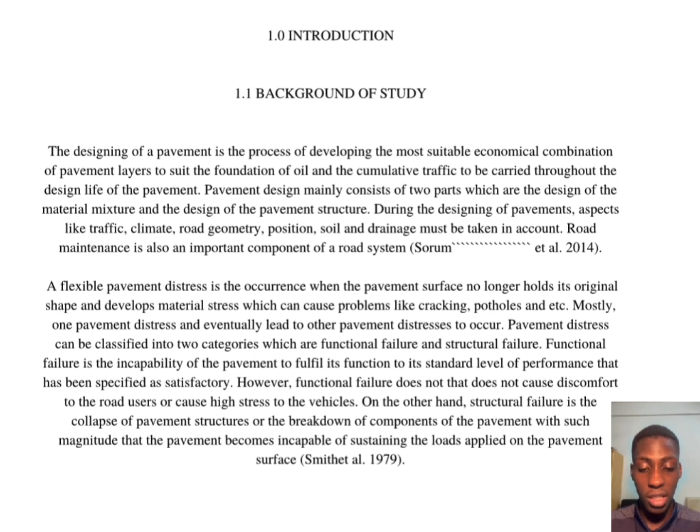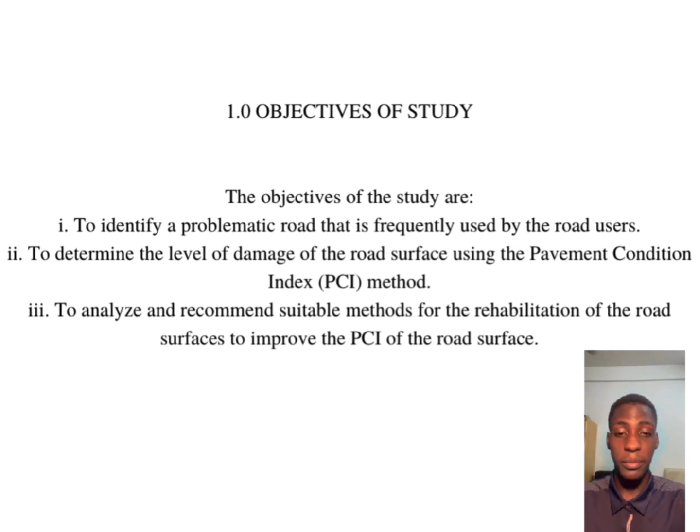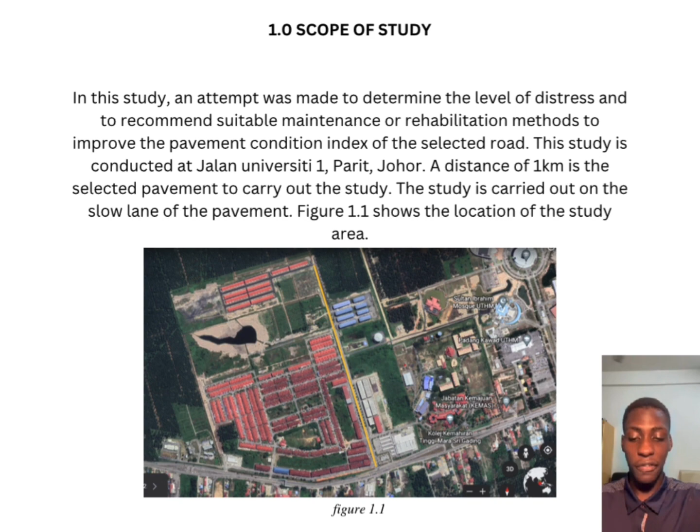The study is conducted at Jalan Universiti 1, Parit Raja, Johor. A distance of 1 kilometer is the selected pavement to carry out the study. The study is carried out on the slow lane of the pavement. Figure 1.1 shows the location of the study area.

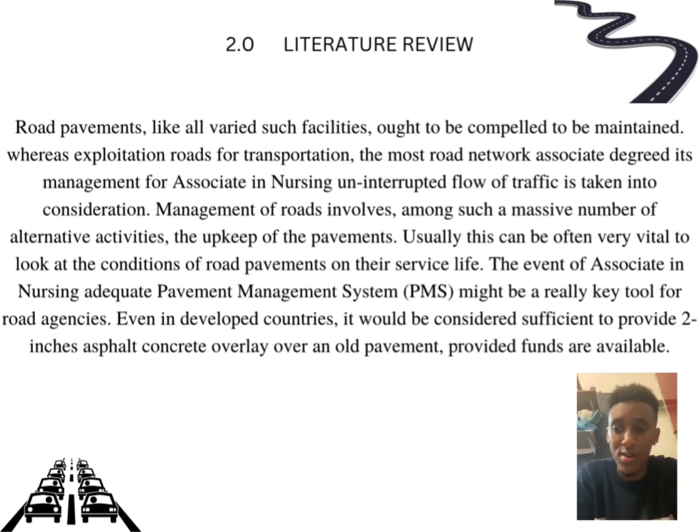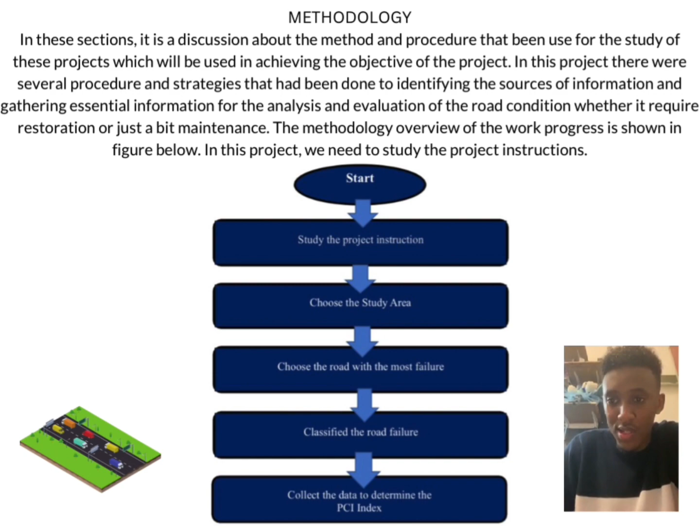So we start: study the project instruction, choosing the area, choose the road with most failure, classify the road failure, and do the PCI index test. These are the steps we follow to do the methodology.

First, the instruction was given by the lecturer during class, and all groups studied it. Second, we choose the area of the objective, and the area we chose was Jalan Universiti 2, Parit Raja.

Then, choosing the most failed part of the road is identified based on the criteria that the tendency of pavement failure is high and needs regular maintenance.

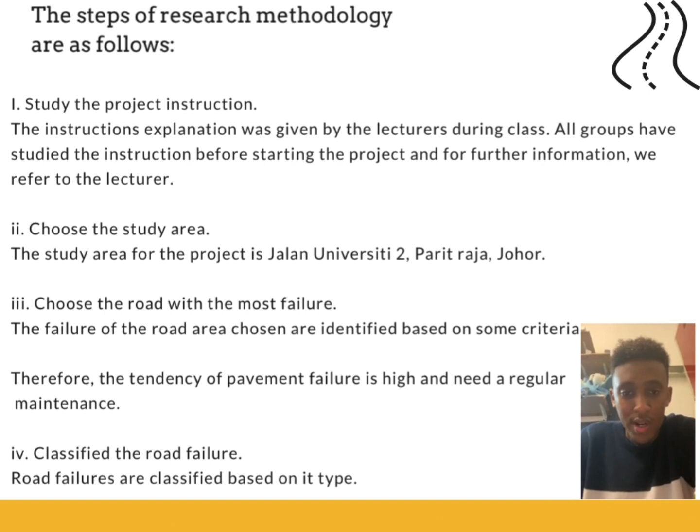At the end, we have to classify the road failure. Road failures are classified based on type: alligator cracking, pothole, shoving, cracking, etc.

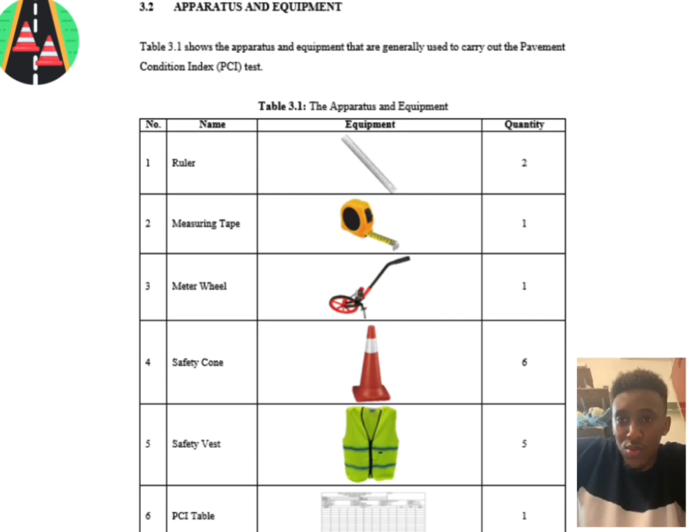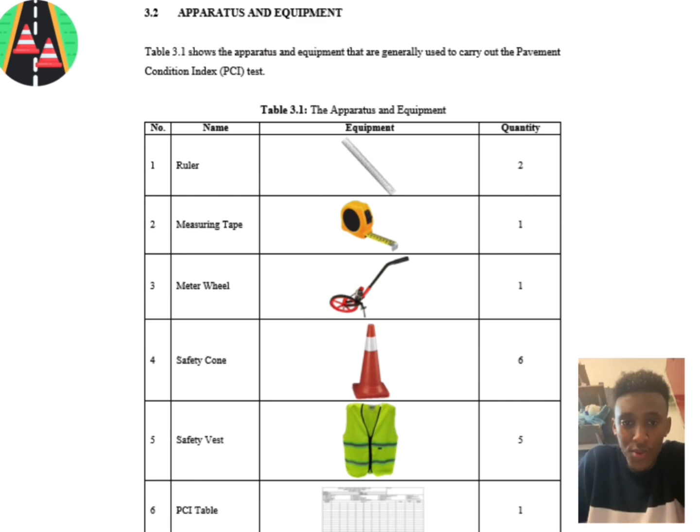Last but not least, this is the equipment we used to do the procedure: ruler, measuring tape, meter wheel, safety cone, safety vest, and PCI table to collect the data. Thank you, that's all from me.

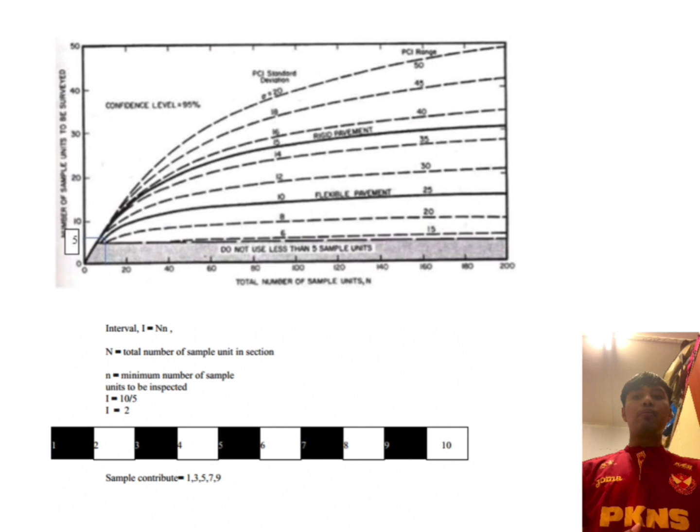When we were at the site, we inspected every section. We divided the section into 10 and inspected each one to find the distresses present. These are the distresses we found in the first section, which is about 100 meters in length and 7.36 meters in width. Because this section was recently maintained, the amount of distresses found was little, and they don't occupy a large percentage of the section's density.

The first distress we found is bleeding at low severity, and the other distress found is shoulder drop off, also at a low percentage. We also found weathering, which is a quite high percentage, but the area of the section is very large.

After finding the length and area of each distress, we found the total. Then we calculated the density using the formula total over area or length, depending on the requirement of the distress, then multiplied by 100 to find the density in percentage.

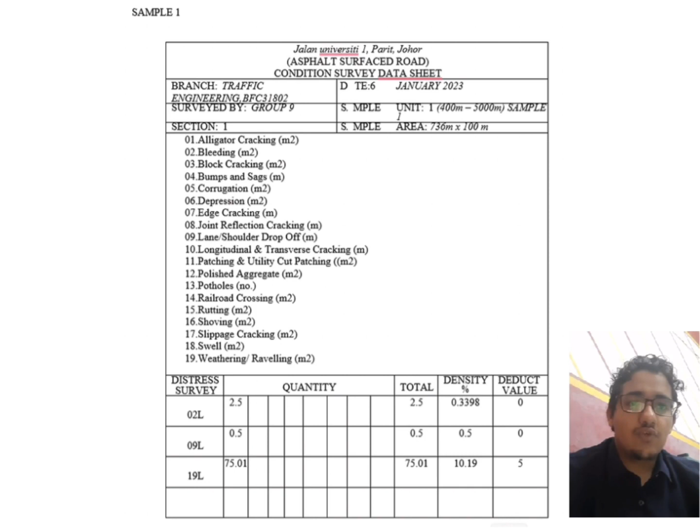From this density we used the density and deduct value graph for each distress to find the deduct values, then tried to find the maximum allowable number of deducts. For the first section, the highest deduct value was 5.

We found m using the formula 1 plus 9 over 98 multiplied by 100 minus the highest deduct value, which is 5, giving us m equals 9.72. Since 9.72 is less than 10, we multiply 0.72 with the number lower than 9. The only available deduct value is 5, so multiplying 5 by 0.72 gives 3.6.

From there we found the total deduct values, which is 5, and from the graph, using the selected deduct value, we found the CDV maximum.

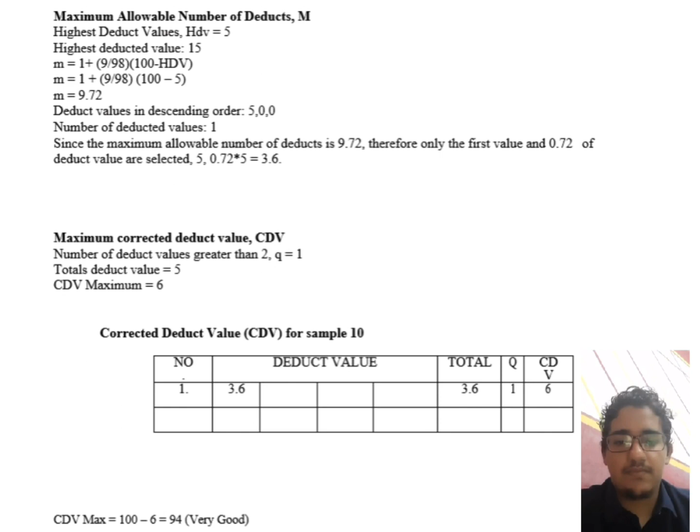For the third sample or section, all sections are divided similarly: 100 meters in length, and they all have the same width of 7.36 meters, giving a total area of 736 square meters.

In this third section, we found a lot of distresses: bleeding in low and medium severity, weathering in low severity, bumps and sags in medium and low severity, and also alligator cracks, but we repeated the same process.

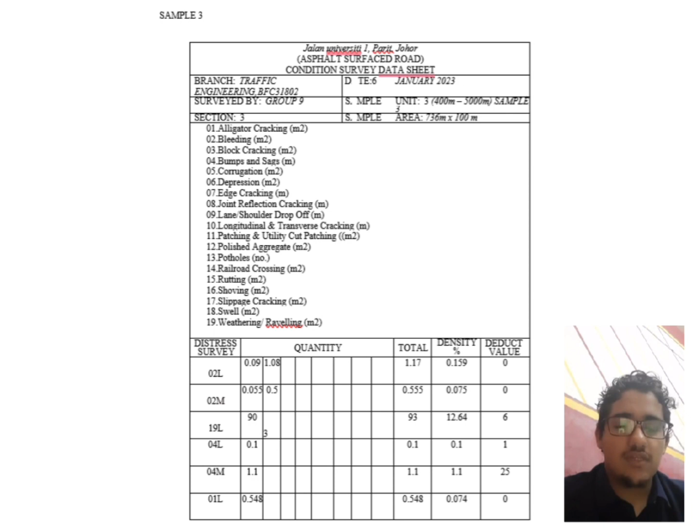We found the meters or areas required according to the requirements, then found the total. Using the same formula, we found the density, and from the density and deduct values graphs for each distress, we found the deduct values.

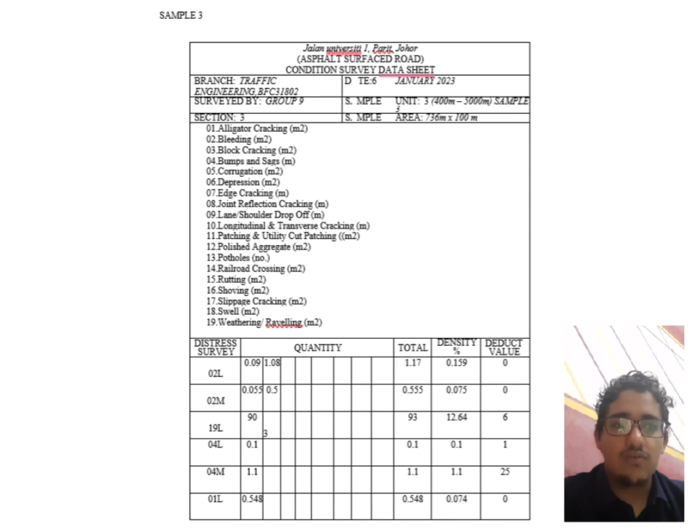In this section, the highest deduct value is 25. Using the formula for M, we found it to be 7.89. The values under 7.89 are 6 and 1, so we multiplied 0.89 with 6 and 1, finding them to be 5.34 and 0.89.

Using the corrected deduct value, we input them and found the total of the correct deduct values and the CDV max, giving us the correct deduct value maximum.

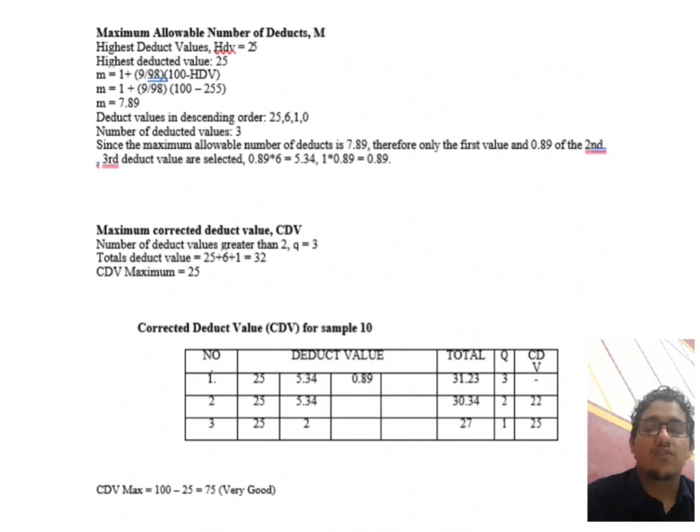Then we found 100 minus the percentage of the correct deduct value, and determined whether this road section is good, bad, or not satisfactory. We found that this road section is in very good condition. Next, I will explain about sample 5.

Then we measure the distress, referring to the type of distress. For example, weathering, we use the area to measure the quantity. Edge cracking, longitudinal and transverse cracking, we use the distance. While the pothole, we measure by number of potholes.

The next step is how we determine the severity, referring to the PCI standard. The standard already mentions how we determine the severity. For example, for the pothole, we must measure the diameter and also the depth of the pothole to get the severity.

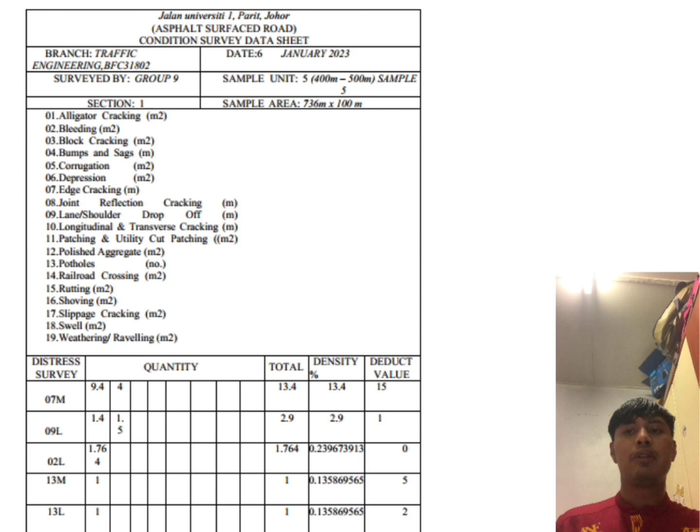After that, we total up each distress and then get the density. The last step, we use the graph of density distress versus deduct value to get the value of deduct.

Then we measure the distress, referring to the type of distress. For example, weathering, we use the area to measure the quantity. Edge cracking, longitudinal and transverse, we use the distance. While the pothole, we measure by number of potholes.

The next step is how we determine the severity, referring to the PCI standard. The standard already mentions how we determine the severity. For example, for the pothole, we must measure the diameter and also the depth of the pothole to get the severity.

After that, we total up each distress and then get the density. The last step, we use the graph of density distress versus deduct value to get the value of deduct.

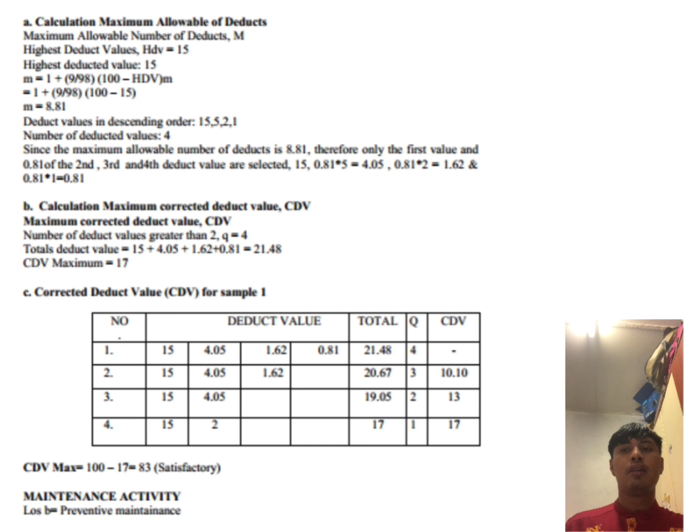The next slide, I will explain about sample 7, which covers chainage 600 meters until 700 meters. The types of distress that we found are weathering with low severity, bump and sag with low severity, alligator cracking with medium severity, edge cracking with medium severity, and lastly bleeding with low severity.

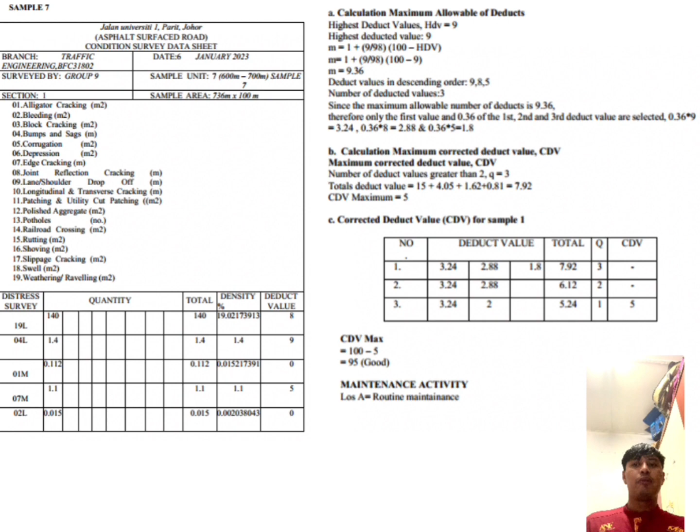With the same method as I mentioned before, we found that HDV will be 9. The maximum allowable deduct value will be 9.36. Then the corrected deduct value is 5. Lastly, the PCI value will be 95. So this sample is in category LOS A, for which the type of maintenance activity contributed is routine maintenance.

The last part, I will explain about sample 9, which covers chainage 800 meters until 900 meters. There are 4 types of distress that we found in this sample, which are bleeding with high severity, longitudinal cracking with low severity, edge cracking with medium severity, and the last distress is alligator cracking with medium severity.

With the same method as I mentioned before, we also found that HDV will be 37. Then the maximum allowable deduct value will be 6.79. The corrected deduct value is 39. So we get the PCI value of 61, with fair condition. So this sample is in category LOS C, for which the type of maintenance activity contributed is rehabilitation.

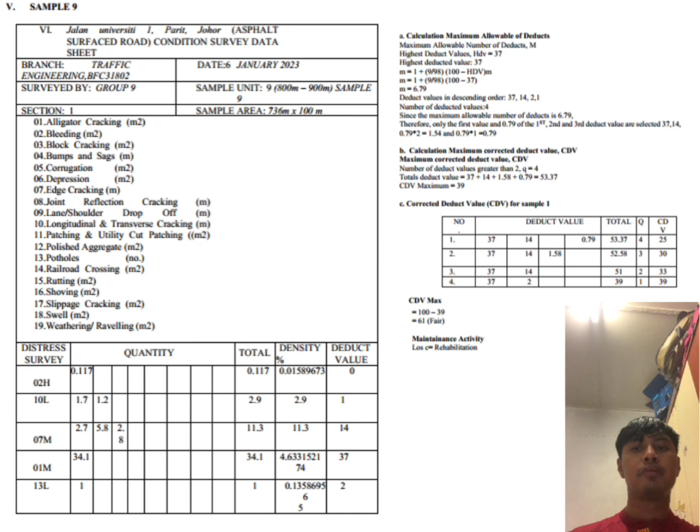So this table explains our summary data analysis. In the end of our data analysis, we can conclude that our average PCI is 81.6, which is in very good condition.

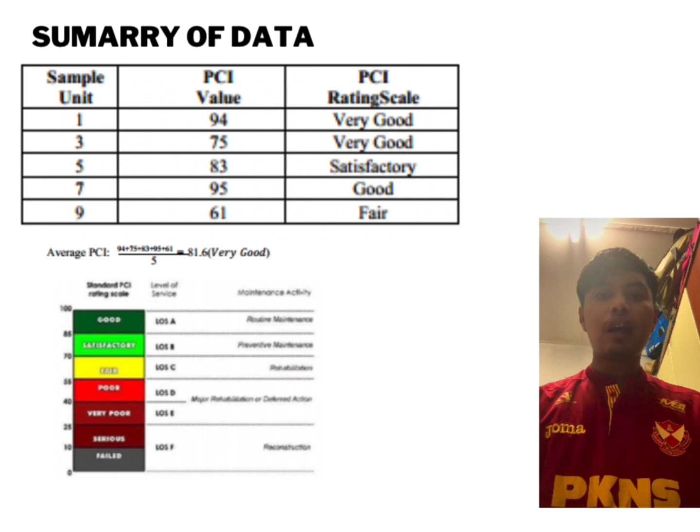For the 5 samples, the survey and method to identify distress were conducted. The summary of the PCI values for the 5 samples is included in a table along with the overall PCI and rating for the Jalan Batu Pahat section. Jalan Universiti 1, Parit Raja, Johor has a PCI of 81.6, which is rated as very good.

According to our review of all the data, sample 3 required more rehabilitation or deferred action than the other samples and had the lowest PCI rating. The observation findings indicate that the sample's road damage included the following types: depression, longitudinal and transverse cracking, patching and utility cut patching, potholes, bleeding, and lane shoulder drop-off.

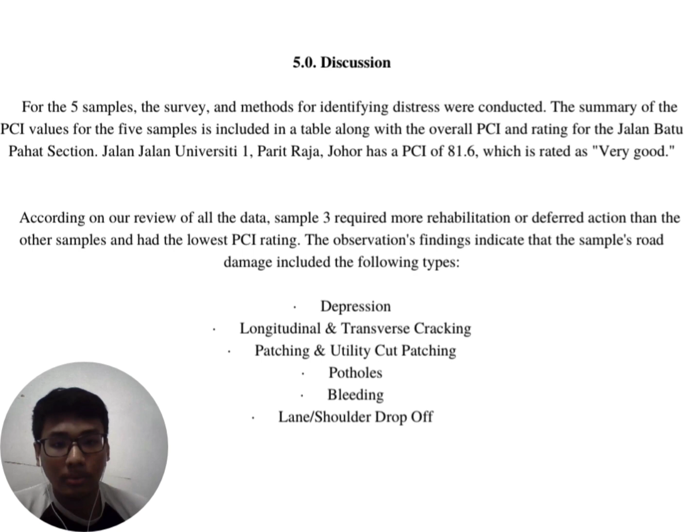Next, for the conclusion, the road was still functioning satisfactorily according to the data gathered on Jalan Universiti 1, Parit Raja, Johor. For the safety and comfort of road users, the authorities in Malaysia must take any road damage seriously. Despite the fact that this highway is in a rural area, it still sees a sizable amount of traffic.

It is evident from observations made there that a lot of cars use this road every day. Road designs that are easier to use and resilient for repeat use should be taken into consideration by the authorities. Since Malaysia has a high average rainfall, which affects the entire road system, road design in Malaysia should also take into account a variety of climatic factors.

Researchers should therefore look for novel approaches to create new materials that provide road resistance or waterproofing. Additionally, Malaysian highway agencies need to modernize their current design and maintenance methods. More suitable designs and practices from other nations must be applied here to achieve maximum user efficiency.